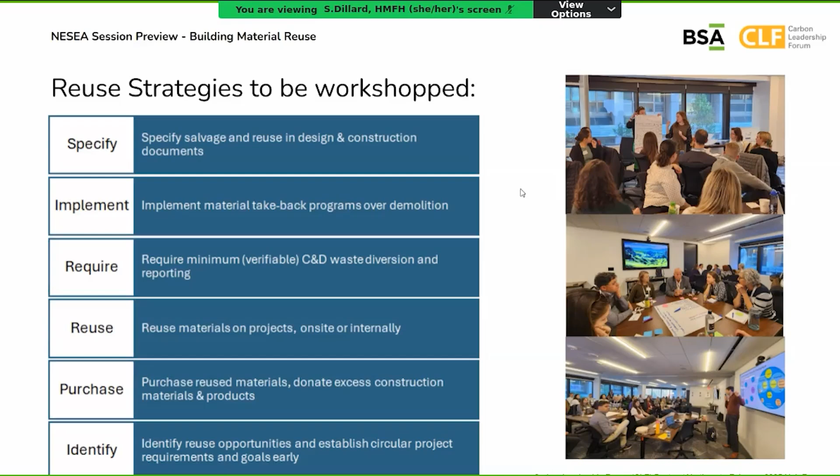Jim, are you on? Yep. Good morning, everybody. This is fun, this is super fun. So I want to hit the next slide.

So the presentation at NESEA is about a project that we're working on, but it's kind of a collective project. You'll notice a bunch of different folks down at the bottom - there's a lot of different folks participating in this project to create...

...a practice guide for soil management aiming at soil carbon. So the whole idea here - from Jared's perspective, system evolution is our jam, and we're working to evolve the construction and development systems to really support soil carbon, which turns out to be pretty important in our world.

So this presentation at NESEA is really expanding the view of carbon into the landscape and the ways in which we affect the landscape. We have 5 big goals.

One is to enhance our understanding of soil health. One is to strengthen existing professional networks and support new partnerships. One is to enable better communication and coordination across disciplines, which turns out to be key. One is to identify key challenges and limitations to doing this work, and finally to provide actionable recommendations and strategies for everyone to share and use.

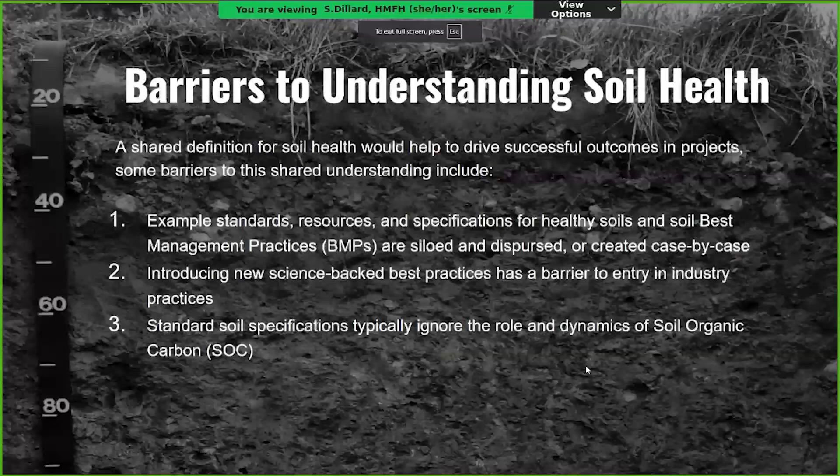One of them is that specifications typically ignore the role and dynamics of soil organic carbon.

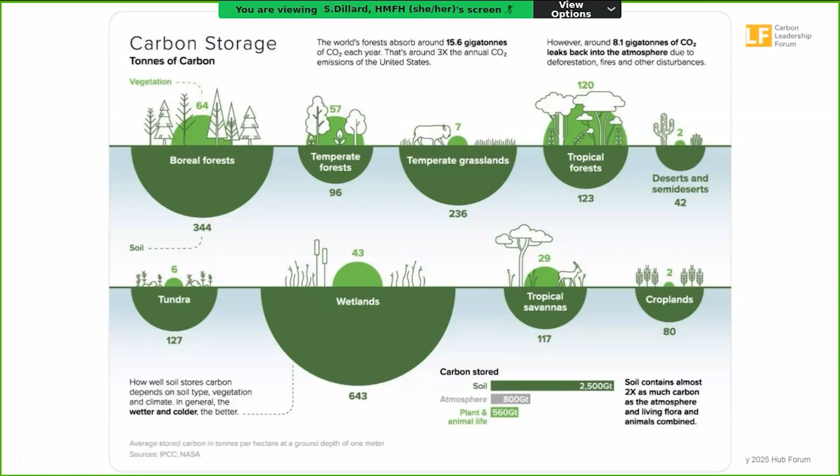Next one - I love this slide, and you'll get to see this later. The lower half circle is carbon stored in soil, and the upper half circle is carbon stored in vegetation. So we are in temperate forests, and you can see it's about 2 to 1, soil carbon to vegetation carbon. That's probably a surprise for a lot of folks.

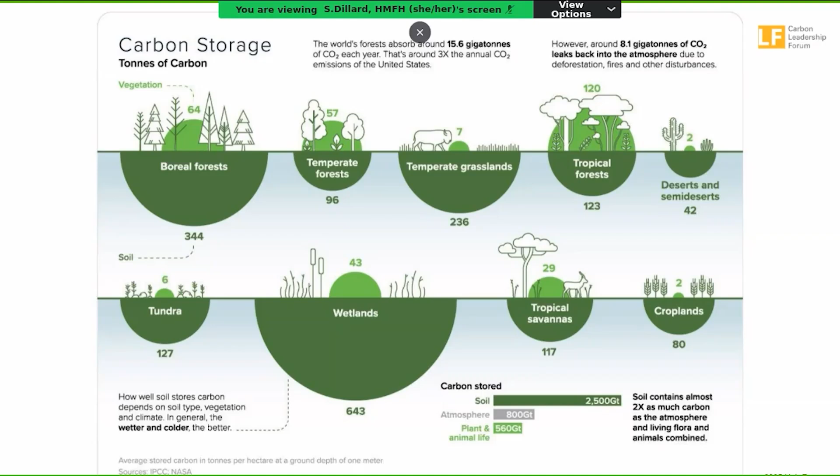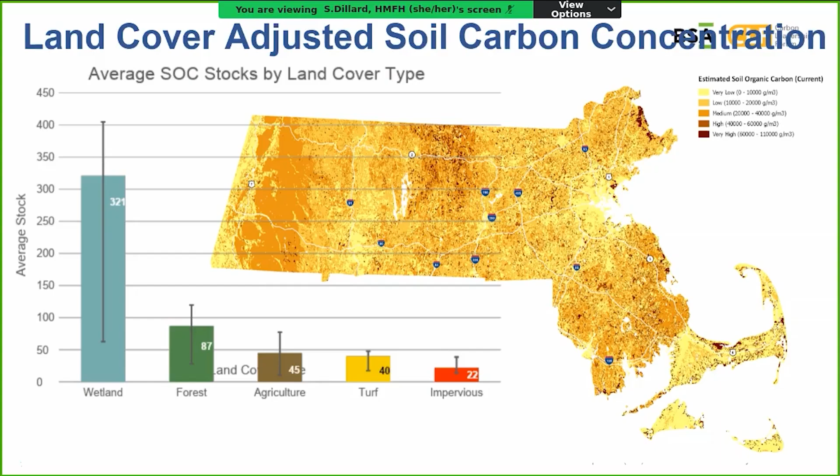You can also see where soil organic carbon is stored in different landscape types. You'll note this is average stock per acre - agriculture and turf are very similar. The highest, of course, is wetlands. One more reason you never want to touch wetlands.

So this is all based on reaching the goals set forth in the Massachusetts Healthy Soils Action Plan that was released a couple of years ago by the governor's office. You can find all this on the Mass Healthy Soils website, or you can just Google it and you'll find that website.

So there are a couple of different types of risks that we see in projects. One of them is what happens in demolition and site preparation - you chew up the soil, you lose 25 to 60% of the total SOC in that soil horizon structure. You can Google soil horizons if you get lost in this.

One of the things about this presentation is it's a little technical, so we're going to do a bit of a presentation at the beginning of the session to really set the technical aspects forward. But the reality of working with soil organic carbon is really about relationships and people.

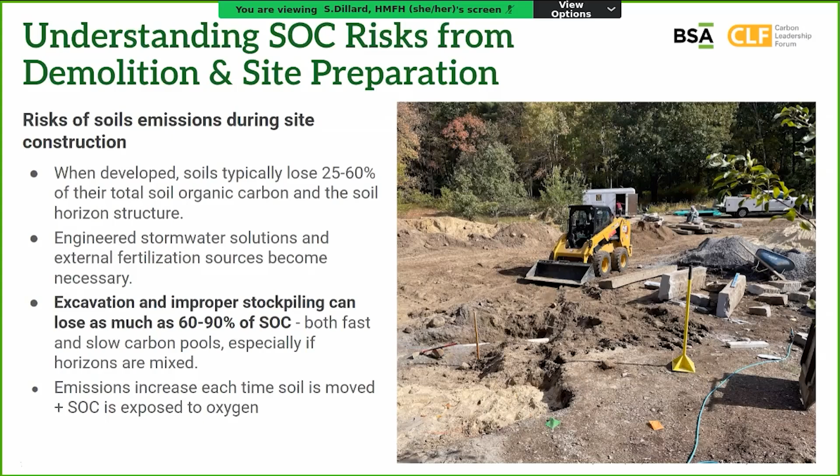A lot of times in engineered stormwater solutions, external fertilization sources become necessary. Stockpiling is a real problem, and emissions increase every time soil is moved.

Some things worth knowing: you should test and understand what you've got. We did this at the Tobin School, a pretty urban site. Right off the bat, we got the early site teams to agree to do soil organic carbon tests along with all the other tests they were doing. It was an addition of about $10 a test, and that gave us a whole understanding of what was happening with soil organic carbon on the site, which we could then work to improve.

Stockpiling is the next thing. Excavation causes trouble, so you want to be really careful. Compacting soils when they are stockpiled depletes organic matter and releases soil organic carbon. As a quick, heavily simplified description, soil has two types of carbon: volatile carbon, which is more dynamic and in flux and sits in the top layers, and mineralized carbon, which roots and plants drive into the soil and combine into mineral forms, making it much harder to disturb.

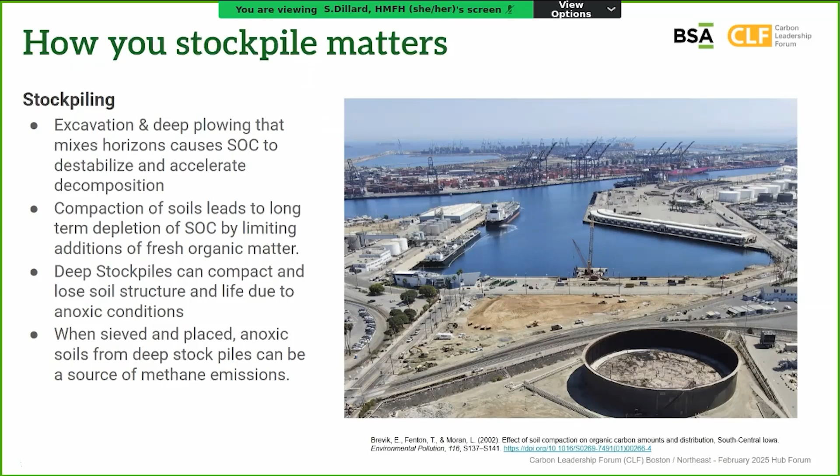When you stockpile soil, all the soil organic carbon in the top layers, the dynamic stuff, essentially disappears. Then you have to think about how you bring it back into the soil horizons in the next step.

There's a whole other part of this presentation about how you think about amendments and how you design soils. One key thing we've understood is that the distribution of decision-making around soil is pretty wide. Civil engineers make some decisions, landscape architects make some, excavation contractors make some, general contractors make some, and they're all kind of separated, with maybe some specs coming out of the civil engineering side. That's something we're trying to really deal with in this project. So I think that's it.

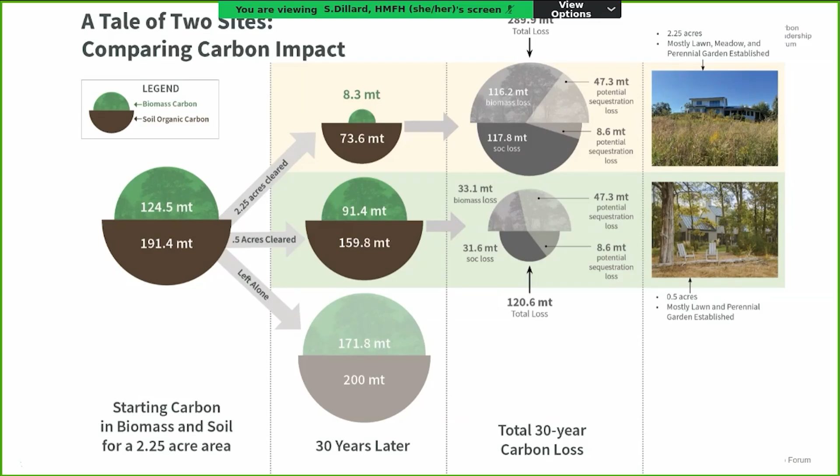Awesome, thanks Jim. All right, Andy and Ariel—are you guys on? Yes, I'll start us off.

Hi, for those I haven't yet had the pleasure of meeting, my name's Ariel Brenner. I'm with the New Buildings Institute, I sit on our codes and policy team, and I'm involved in the bulk of our embodied carbon work. I'm joined by Andy Buccino, who I'll be co-presenting with at the conference, and whom I'll let introduce himself shortly. Maybe next slide.

I'll start at a high level with what our presentation will focus on. We'll be looking at scaling embodied carbon through codes and programs, looking at the existing landscape of codes and policies currently addressing embodied carbon, and then at the most recent and ongoing efforts to introduce new or evolve existing provisions, with a particular focus on model building codes and standards. Here at the New Buildings Institute, we've been involved in a number of those efforts in a couple of different contexts, which I plan on describing in detail in this presentation.

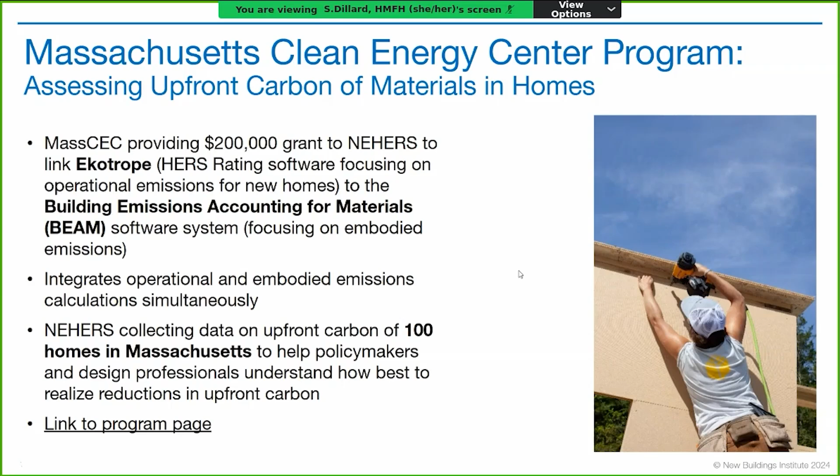I don't know if I should say more because Ariel and I need to actually have a conversation. I think we're going to get together Monday. But that's where we're at. So we look forward to presenting with Ariel and seeing everybody there. I'm really excited and grateful for the opportunity. Thanks.

Thanks, Andy. Thanks, Ariel. All right, Christopher, I think you need to share your screen, right? Yeah, I didn't play by the rules. Sorry, guys.

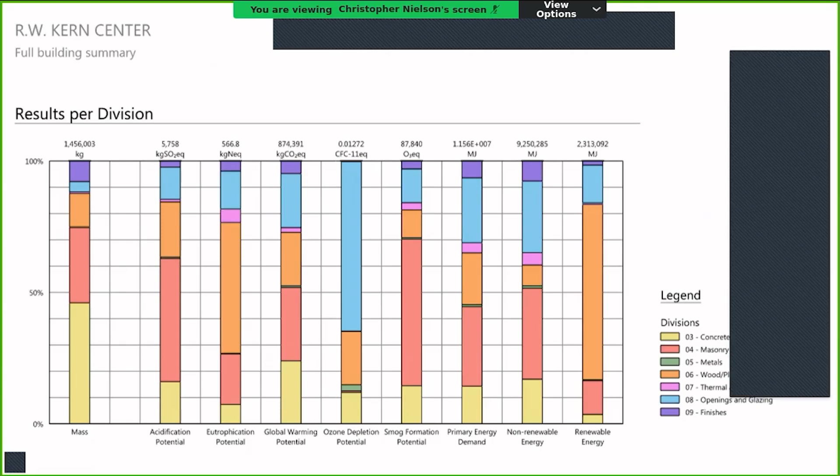I will admit in the first case, looking at the R.W. Kern Center, trying to meet the Living Building Challenge, we didn't even know about Tally at the time and started using the tool basically as a check against the Athena eco calculator, which we determined was not super accurate. Turned out actually to have some similar results, we think, from mutually canceling errors. But it was our sort of first foray in learning how to use these tools.

And then at the Amherst College project, the college had just identified carbon neutrality by 2030, the year before they'd agreed to their plan, and before we started construction on this project. And they're a campus that's actually walking the talk. They're rebuilding their entire heating, cooling, and powering systems, and they will actually get to net neutrality for 2030 just based on the operations. So when we were engaged to work on this project, they wanted to go beyond that and really think about what the building was being made out of and tackling the embodied impacts as well.

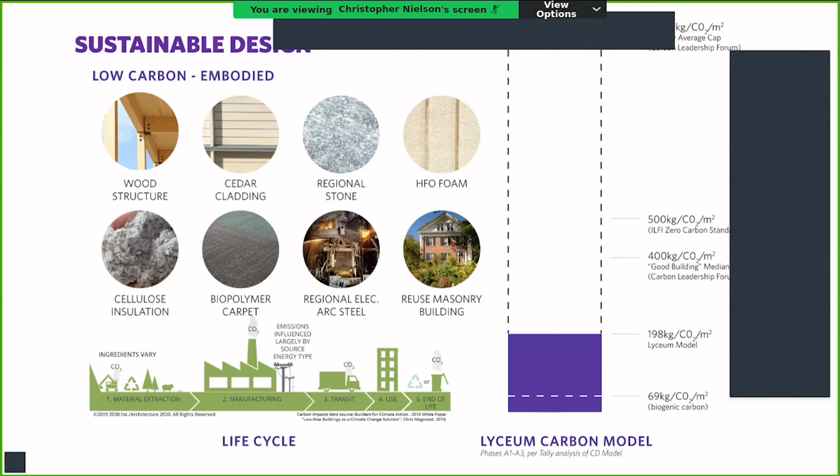And at that point, we knew a little bit more about how to deal with this, and we started to use this as an example of how to benchmark a project. The college in the end decided not to pick a third-party certification process, but we used it as an example to try to set what is a really good target, how can we measure that, and then what are the strategies in order to get there.

And in both of these projects' cases, our first focus was on structure, but then very quickly turned to wall assemblies. These are some wall assemblies that we looked at very early on just to compare how you would actually build the envelope of the new portion of these buildings, starting on the right hand side with a more business as usual steel studs, exterior insulation, and then all the way on the left, which is where we wound up, which is a double stud wood cavity wall.

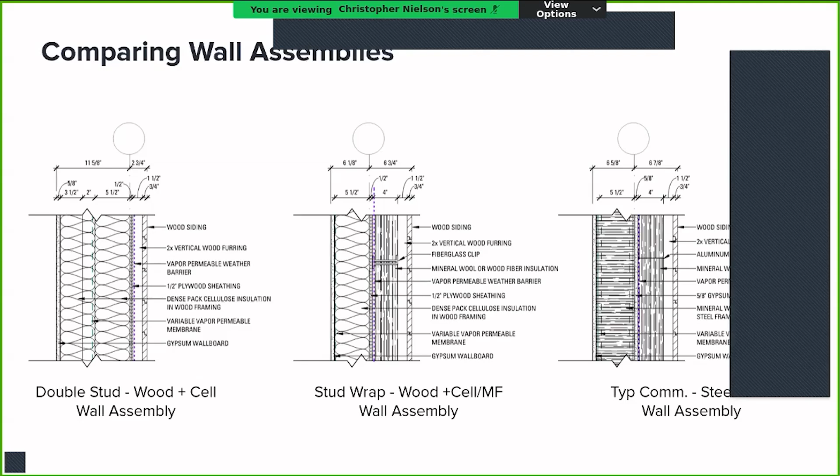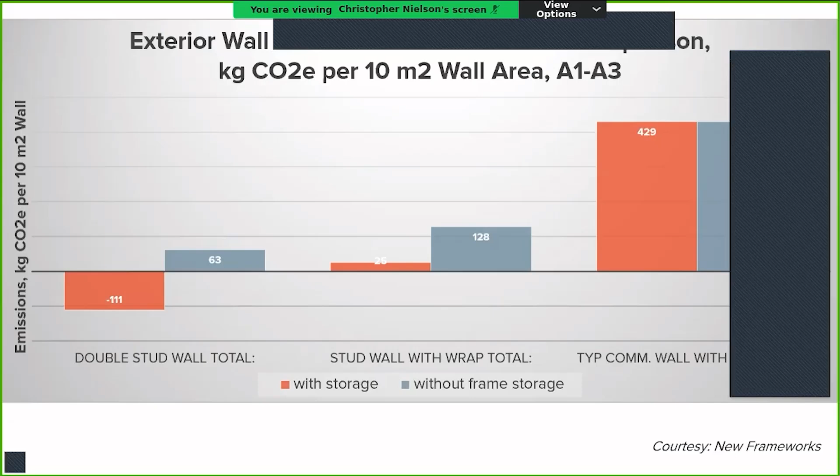In the first project, we have a very similar double stud wall as well. But when we got to the Lyceum project, we had an envelope consultant who was very nervous about putting all of our insulation in the cavity, which we'll get into in a second. We had Jacob on our team to help us look at these 3 different options and really determine why you might make some choices about what you're building your wall out of, and why you might not want to choose business as usual. We were able to work collaboratively with our client and their envelope consultant to figure out how to make an actual durable wall assembly using basically wood-based materials.

So we have these 2 projects. They're both very, very similar. They're both located a couple miles from each other. They're in the same climate. They have almost the exact same wall assemblies. However, in the more recent project, we had included a smart vapor barrier, and we actually, through doing some mock-ups, wound up needing to locate it in 2 different locations.

So the left-hand side is the project that we built, finished around 2016. We came to the conclusion with our, we were actually working with Marc Rosenbaum on this project, that we could rely upon the latex paint as our vapor retarder. So no real vapor retarder in that. And then on the right-hand side, the 2 different wall assemblies we have for the Amherst project, we wound up using a smart vapor retarder in one case in the middle of the wall, and then the other case on the inside face of the wall.

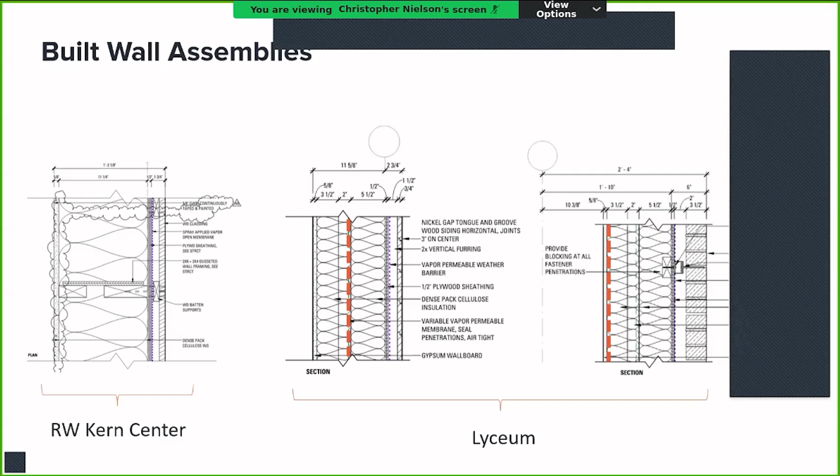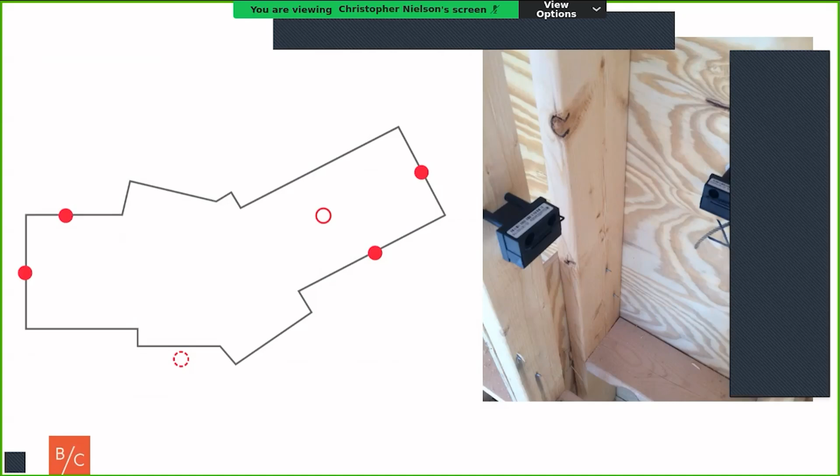Because I felt like it was really weird that we had all these different recommendations on whether we should or shouldn't use the product or where it should go, it seems like this was a really good opportunity to find out what does it actually do. So the first case at the Kern Center, when no one could tell us whether we should or shouldn't put the thing in, we decided to stick some moisture meters in the wall just to see what would happen.

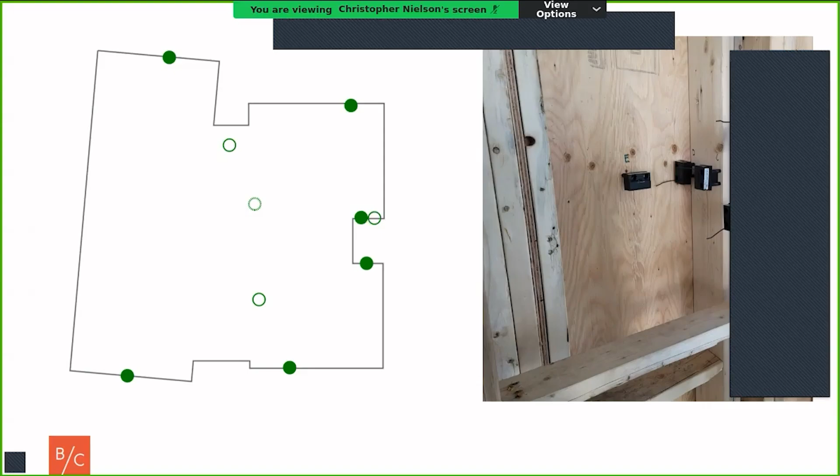On the left-hand side is a little outline of the plan. The filled in dots are reading the data within the wall. This case had 2 sensors in the wall, and then some controls. At the Lyceum, we had finally finished our paper on the first building. We wanted to get a few more points. We were working with an envelope consultant, so somehow we wound up putting 5 points in each one of the walls. Again, part of this was because we were locating the vapor barrier in the middle of the wall, but we have just a heck of a lot more data to look at.

When we look at the 2 different models, or the data that's coming out of both of these projects, what is interesting: on the upper part we have the more recent project with the vapor barrier, and the lower part we have the more open wall, so to speak. These are reading moisture content, so there's a lot of data you can get out of these little meters. It's a meter system from a company called Omnisense. They were described to me as, I can't remember who said it, but basically they're really easy to use. You screw these things into the wall, you set up a cellular gateway, and then there's an online database that gathers all your information.

What we're really concerned about in both of these cases is condensing inside the wall. When you have a cavity filled insulated, when your insulation is in the cavity, you risk moisture, especially on that outside side of the wall. That moisture, if it's in the right temperature zone, can lead to mold growth. In the most simplest form, we're going to go in our session into a lot more detail on the data we collect, but in the most simplest form, we're looking to keep our walls lower than 20% wood moisture content in order to avoid damaging the wood, but also growing mold.

So you can see in both of these cases, both in the upper one and the lower one, in the middle of the winter, sort of peaking around January time, we're getting upwards of 16% wood moisture content, so we're kind of coming up there, but then it's able to dry out in the summertime.

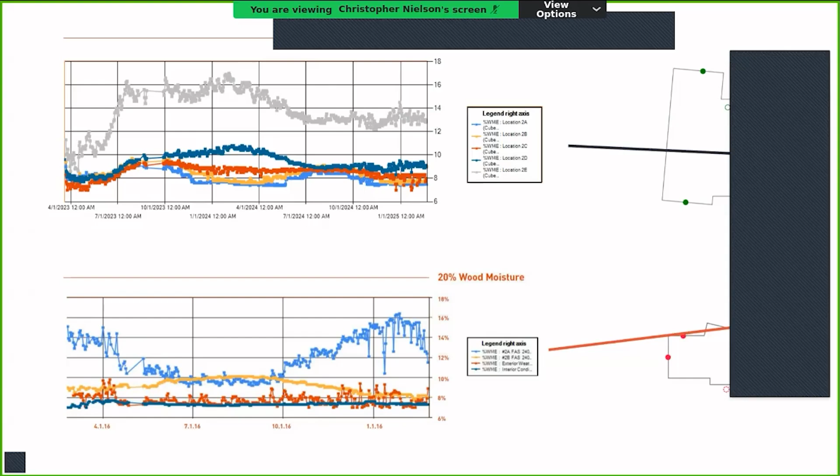So looking at the difference between these two is sort of interesting because the total content is actually not really different at all. And then as we go to the next one, we look at the differences, whether we're locating that barrier on the inside face, on the upper part, or in the middle. What we do see is that there's differences throughout the different parts of the wall.

So all the different colors in each one of these graphs, the gray at the topmost graph is the outermost portion of the insulated cavity. And then you have different locations as you get closer and closer inside. So you kind of see that it's getting spread out a bit more when you put the barrier in the middle. We are still in the process of digging through a lot of this data.

So again, this is really about the fact that I am incredibly pleased to have met Deanna to help work through this data so that we actually have real information about the safety and durability of designing these walls. There is tremendous reason for using biogenic materials in these envelopes. It just makes a humongous difference in the overall embodied carbon of the project.

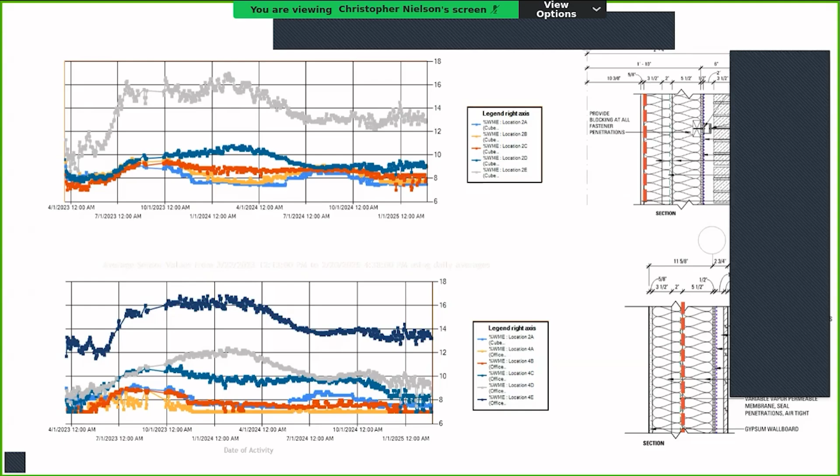And so what we're hoping is that the more we can share this data, the more strength we give to other projects of this kind of scale to start thinking about using these strategies when they're building, when they're deciding what their envelopes are made out of. I think that's it.